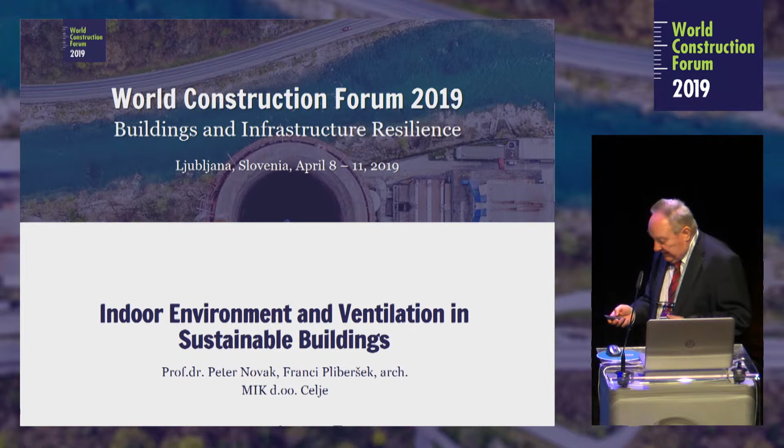My lecture is really the transition from the BIM to energy, which will be tomorrow at this conference. And I was thinking that we have to talk about the indoor environment and ventilation in sustainable buildings, because this is part of the maintenance. And I think that BIM is important for the new building.

But because we have in the world millions of old buildings which have to be renovated from the energy point of view and quality of life point of view, the BIM, the 6D BIM, is a very important way to find the cheapest and long-term adaptation of existing buildings to the new situation which we are going into.

Renewable energy cannot be used in the buildings if we don't know how to optimally change the envelope, how to optimally make the ventilation, and so on. But I will go directly only to the ventilation. This is one small problem and one small piece of the BIM element, and I will be talking about the indoor environment requirements, particulates and human health, sustainable building characteristics, problems of renovated buildings, solutions and conclusions.

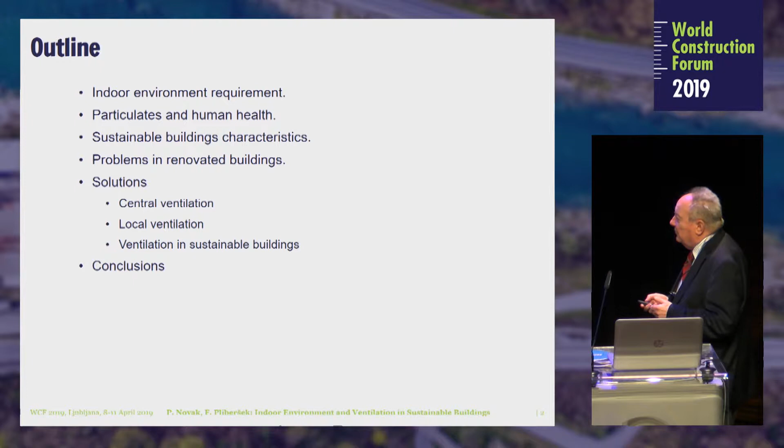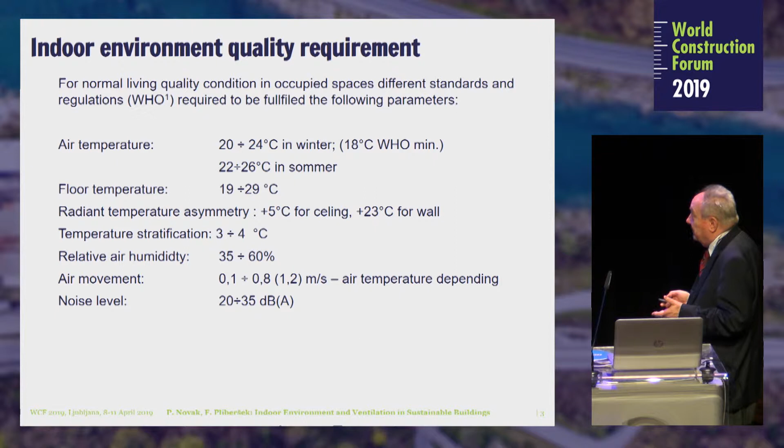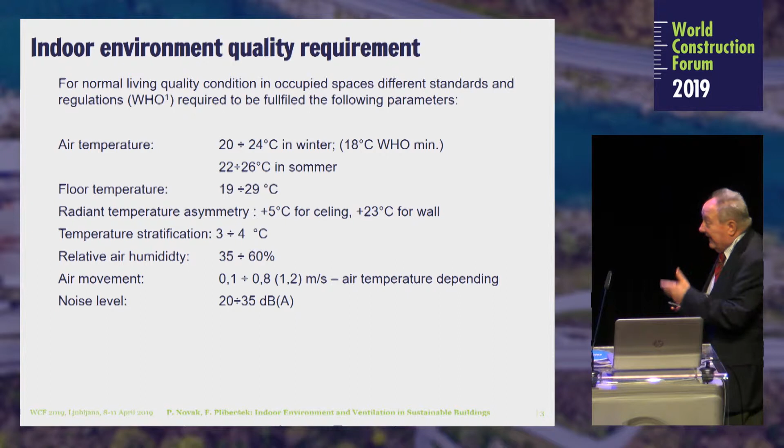You all know that 80% of our life we are living in closed rooms, in the buildings, and we would like to have beautiful indoor air. We would like to have a very nice temperature. The World Health Organization prepared some standards. Of course, this is very nice, but I think 50 to 70% of the population in the world cannot live in such a high quality environment.

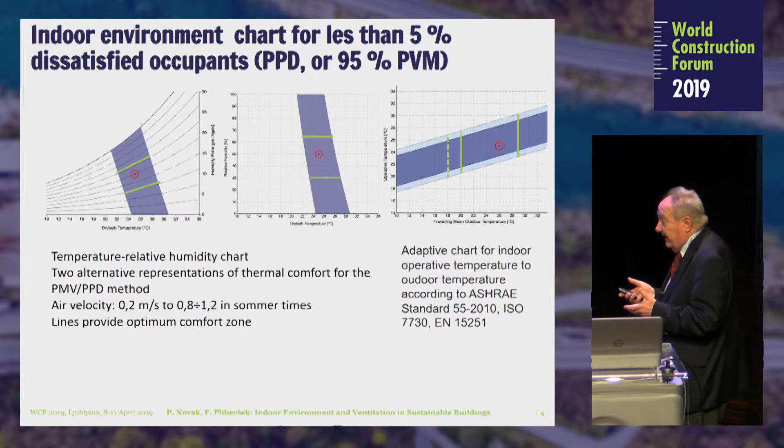There are also different standards, and you can see here in this chart that we are not so sensitive to the temperature and the humidity. The range of temperature change and humidity change is different. But in this chart, we cannot see what is with the velocity of the air in the room and what air pollution is present in the room. Indoor air pollution limits are much less known to people than temperature, humidity, and so on.

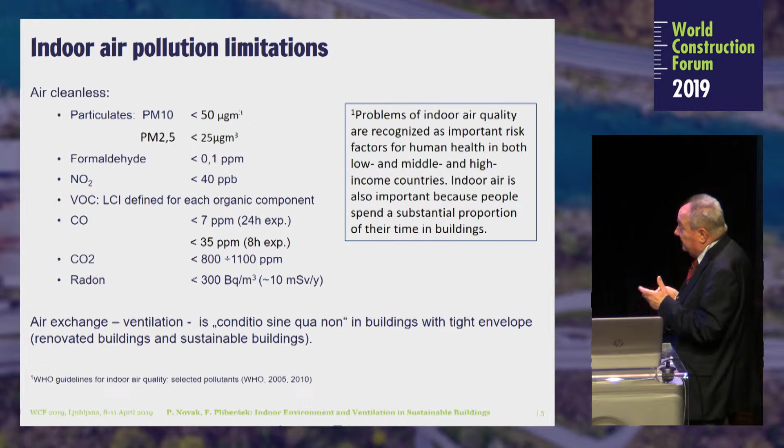If you look at the data, we have different parts per million, parts per billion requirements, especially for CO2 or radon. But the World Health Organization tells us that there are about 7 million more people, I will show you later, devoted to different diseases when the indoor air is polluted, and also why it is polluted.

Ventilation is the conditio sine qua non. There is no problem. But exposure to airborne particulate matter is one of the most significant environmental risks for people. Where is the air pollution coming from? Mostly the air pollution in the room is coming from the outdoors. This means if we are ventilating the buildings, opening the windows, then we also get the pollution in the room.

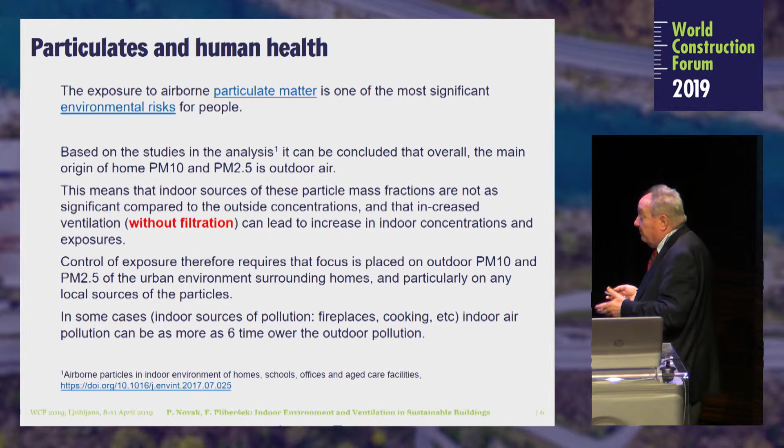The pollution is different: we have PM10, the particulates of 10 micrometers, and PM2.5, which are mostly in the urban area because of traffic and so on. And all this pollution is coming into the room. There is also some pollution from fireplaces and cooking and so on, but normally most polluted air is coming from the outside.

If you look at where this polluted air started and how different types of buildings are involved, we see that for homes, we have pollution coming from outside and indoor pollution. In schools, most pollution is coming from indoors. And in offices, most of the pollution is coming from the outside.

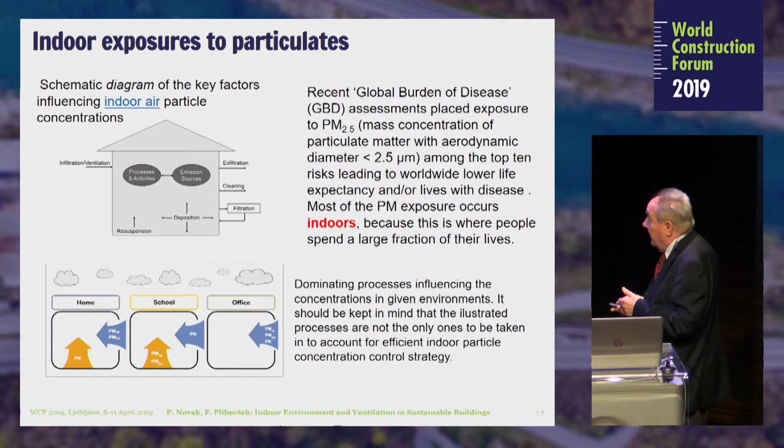If we would like to have sustainable buildings for the future, the air must be clean in the rooms, and a sustainable building is a building made from sustainable material, with low exergy and energy. Exergy is the working part of the energy. The sustainable building needs a very low amount of energy. Sustainable buildings have a very tight envelope. They have an appropriate window area on the south, west, east, and so on.

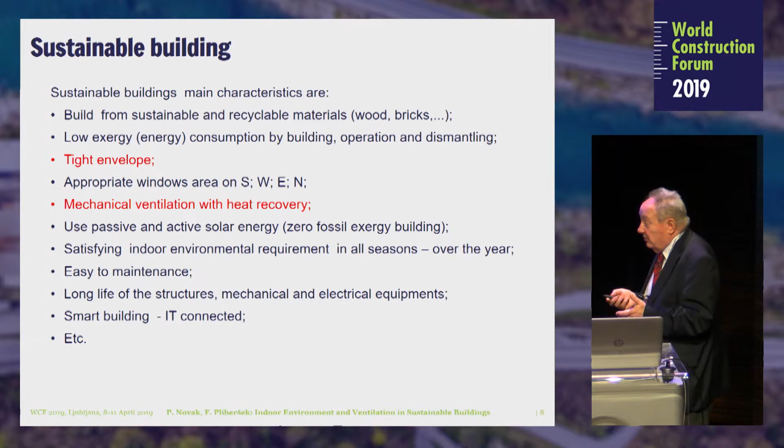And all sustainable buildings at the moment, and maybe in the future, have mechanical ventilation with heat recovery, and so on. The sustainable building has to be easy to maintain. This means all installations in the building have to have a long life and be simple to maintain. And of course, the sustainable building is also the smart building, connected with information technology, the building which is connected with BIM.

What are the problems? The problem we are facing, especially in the last 10 years, is that we are going to renovate the existing buildings.

We have different directives and rules, national and international, and normally all existing buildings have low thermal insulation. Windows are single or double glazing in frames with large cracks. The outdoor environment in towns and cities has increased air pollution. There is also a lot of noise pollution. If you have the noise, you cannot open the windows.

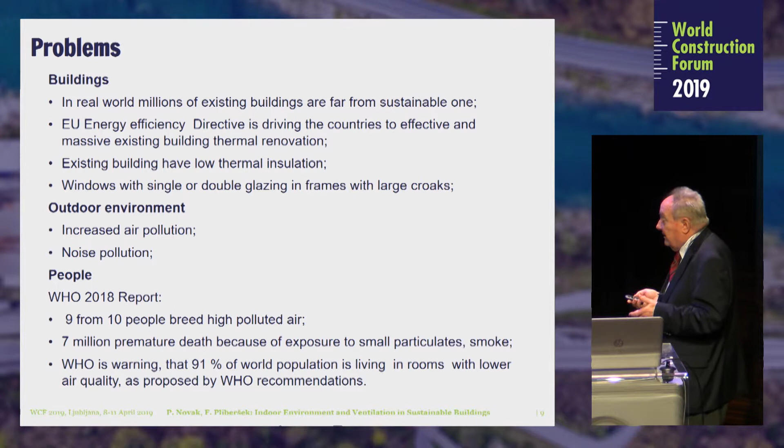And of course, of the people living in existing buildings, 9 out of 10 breathe highly polluted air. This is the World Health Organization report from last year. 7 million premature deaths because of exposure to small particulates and smoke, especially particulates less than PM2.5 micrometers. And of course, WHO is warning that 91% of the world population is living in rooms with lower air quality than proposed by its recommendation.

What to do? In building renovation, we are missing an integrated renovation approach because of lack of capital, unsatisfactory planning, ownership in multifamily housing. We just heard that Slovenia has 88% private ownership, and of course inconsistent subsidies. The most common problem we are facing is that people are changing the windows without installation of mechanical ventilation at the time of renovation. There is no money for the installation.

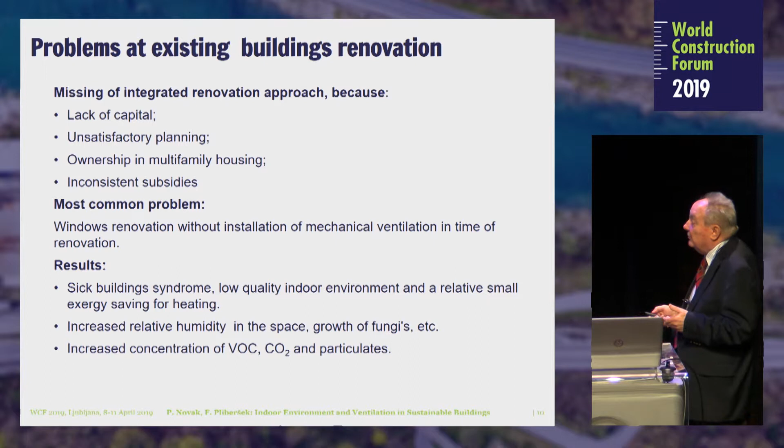Results: we have sick building syndrome, low quality indoor environment, and relatively small exergy saving for heating. We have increased relative humidity in the space, growth of fungus, etc. And of course, we have increased concentration of particulates, VOC, CO2, and so on, just from making very tight windows. Then, of course, we can ventilate.

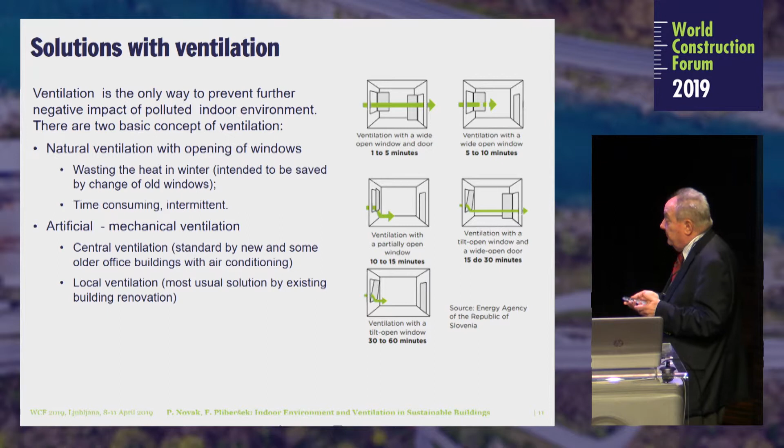The problem is simple, but there are some pros and cons. But I think that artificial ventilation for renovated buildings is necessary. We have two possibilities: central ventilation, standard in new and some older office buildings with air conditioning, and the possibility to make local ventilation, which is the most usual solution in existing building renovation.

Central ventilation is excellent if you have good maintenance. You can imagine, I will not show you the ducts which we are opening after 20 years in the ventilation of buildings, especially the return ducts. What is everything in the ducts in these buildings? This is dangerous for health. We have a lot of emittents and so on. So sometimes central ventilation is okay, but the condition is excellent maintenance.

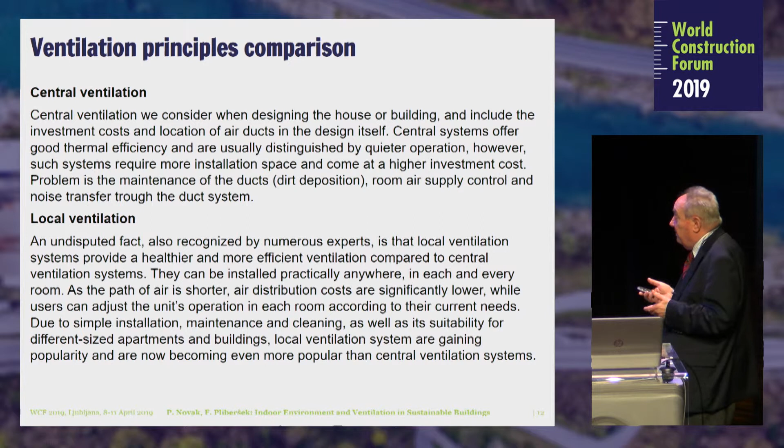Local ventilation: it is an undisputed fact, also recognized by numerous experts, that a local ventilation system provides healthier, more efficient ventilation compared to a central ventilation system. I will show you later the advantages of local ventilation. If we compare the central system with lots of ducts, investment, controls, dampers, and so on, for local ventilation we don't need any ductwork. It's simple installation in different rooms according to the user need. There is extremely nice operation flexibility.

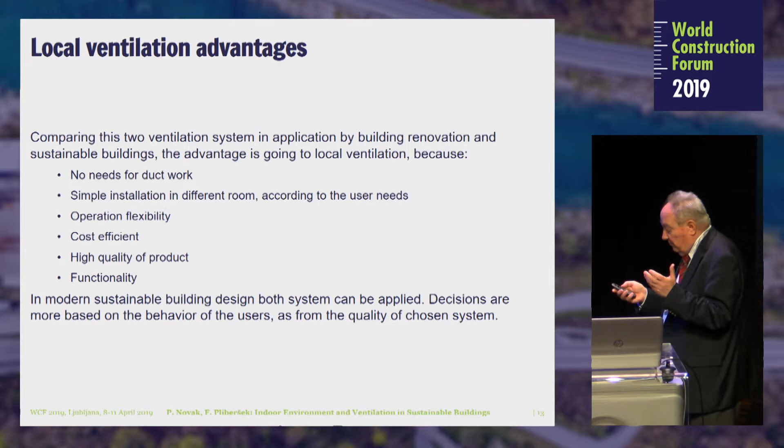It's cost efficient. On the market, we now have very high quality products, and functionality is excellent because all these modern local ventilation units are built like the big central air conditioning systems using modern IT technology. This is one example of how modern local ventilation units work. We have outdoor grills, a motorized damper for closing the building envelope in standby time. We have a high efficiency outdoor filter with efficiency for 2.5 micrometer particulates of more than 50 to 70%. Only the viruses are going in, all the rest stays in the filter.

We have the counterflow heat exchanger with efficiency between 70 and 95%. We have the supply and exhaust low noise fan. We have an indoor air filter. And of course, we have the control units with information technology capability for fan speed control, indoor and outdoor temperature and humidity sensors, VOC, CO2 sensors, radon sensors on request, Wi-Fi, remote control with timer, movement sensor or video camera installed in the local ventilation unit, and you can find out with your phone what is going on at home and so on.

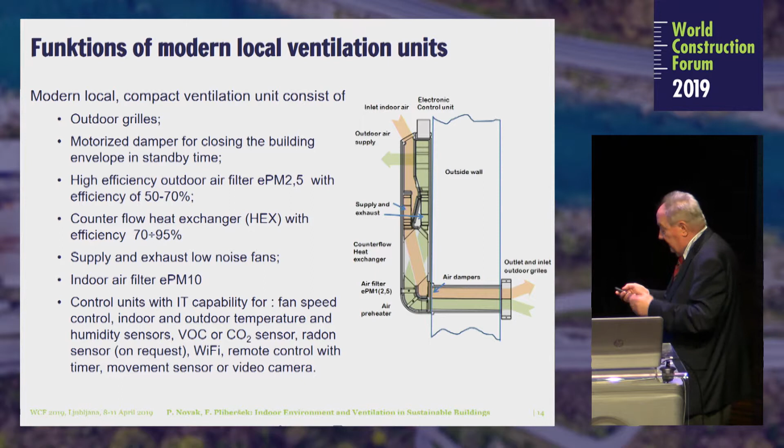How the local ventilation unit operates. The units can be operated locally by remote control like this one, or via telephone, Wi-Fi, PC, and so on. Units are the most advanced equipment in-house and prepared for the present and future smart building. Some of them also have an electric preheater to prevent freezing in the heat exchanger on cold days. The unit can operate as exhaust ventilation or as only supply ventilation, and this last is very interesting for summer night cooling of the rooms. Operating advantages of local ventilation units in apartments, office buildings, hotels, motels, etc.

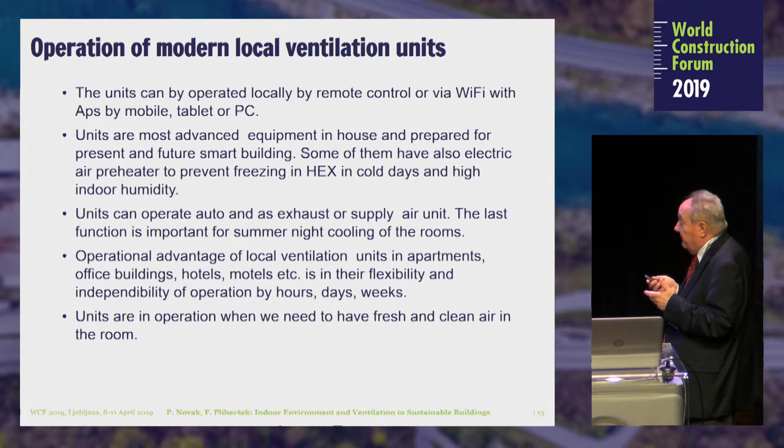is in their flexibility, independability of operation by hours, days, and weeks. For hotels, for the owner, it's very easy to control with the unit, to know where it is working and what is working, how is the quality of air in the room and so on. Units are in operation when we need to have fresh air and clean air in the room, and not always.

What is the energy? Exergy consumption. Energy cannot be consumed, only exergy can be consumed. With the new standard, there is proposed specific power input for local ventilation units, and this is limited to 0.11 to 0.40 watt per cubic meter an hour.

And the best unit in class 0 needs per year, per cubic meter, less than 1 kilowatt hour of electricity. And in class 6, this is the last class, we need 3.5 kilowatt hours per cubic meter for the operation. I'm sorry, there the watt is watt hours.

The needed amount of outdoor air is depending on the occupation, of course. And we can supply more or less air. All the local ventilation units have speed control, and you can change the air supply from almost zero to the maximum. And what is very interesting also, in the United States this year, in February, has been showed

at the ASHRAE Congress the new electronic air purifier, which is a new indoor air scrubber for chemical washing of the indoor air, and the outside air volume can be reduced by 60 to 80% without problems of indoor air quality. The scrubber safely removes all molecular contaminants, including CO2, formaldehyde, and the full range of volatile organic compounds.

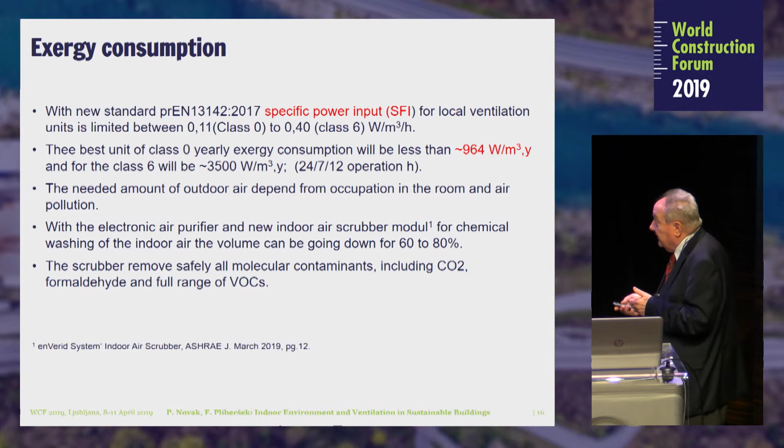This is what we have now on the market, and for sustainable buildings we have two possibilities: provide a central system or a local system. The calculation and the maintenance of both have to be decisive for the decision maker what to do. For the old buildings, 300,000 of 600,000 in Slovenia, millions in Europe, I think it is very difficult that by renovation we can introduce a central ventilation system.

But we have to clean the air. Ventilation is not necessary because of a lack of oxygen. The problem is the emission of particulates. This means the polluted air has to be cleaned. And that is what we have to do with sustainable buildings.

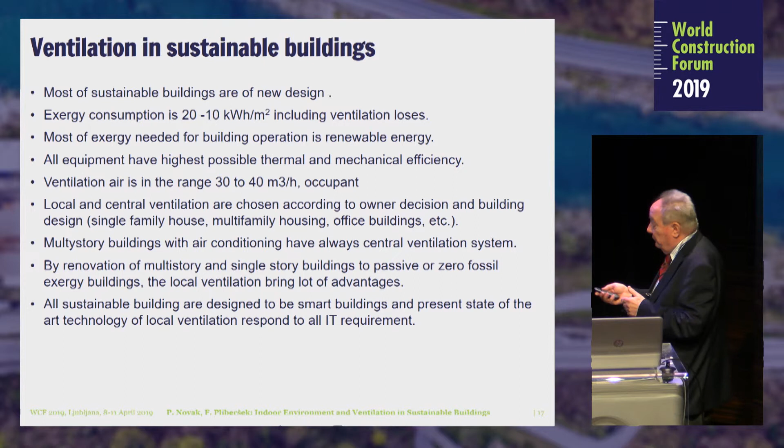For the conclusion, I will say renovation of existing buildings makes them more tight, similar to the modern sustainable low exergy or zero fossil exergy building. Both need artificial ventilation to provide occupants a healthy environment. Between the central and local ventilation principles, the authors prefer the local ventilation system because of high flexibility, simple installation, energy efficiency, low investment cost, and high quality of the product on the market.

The new products for local ventilation are a new stone in the direction of the smart building with their connectivity and flexibility.

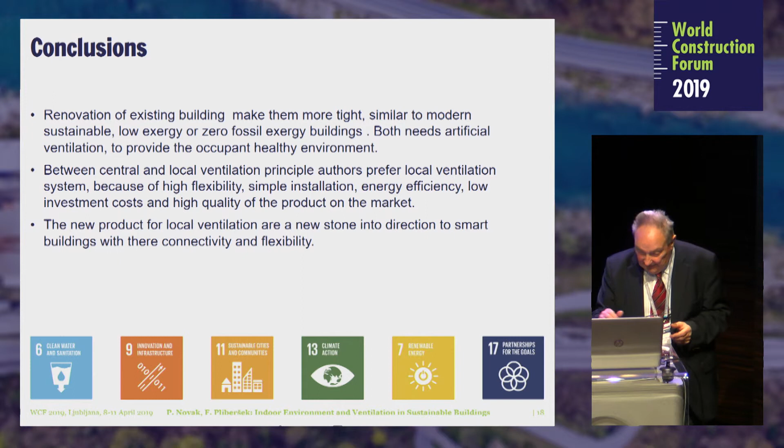Maybe one question? Regarding the directive, what is your opinion? What was the impact regarding ERP and what was introduced on the 1st of January 2018 with new requirements in the directive for local units? What is my opinion? Yes.

My opinion is for new buildings both can be taken. For old buildings, I prefer local ventilation. But also for hotels, for new buildings which have no air conditioning as the basic system for heating and cooling, local ventilation is also the best solution. This is my opinion, and we are working on this to have the best product.

And what is interesting, this local ventilation unit can also be a weather station, because we have all the data: outside temperature, humidity, inside temperature, humidity. We have the air pressure, and we can follow the change of the weather. This is the weather station. And it's very simple to see on your mobile phone what the weather is at home.